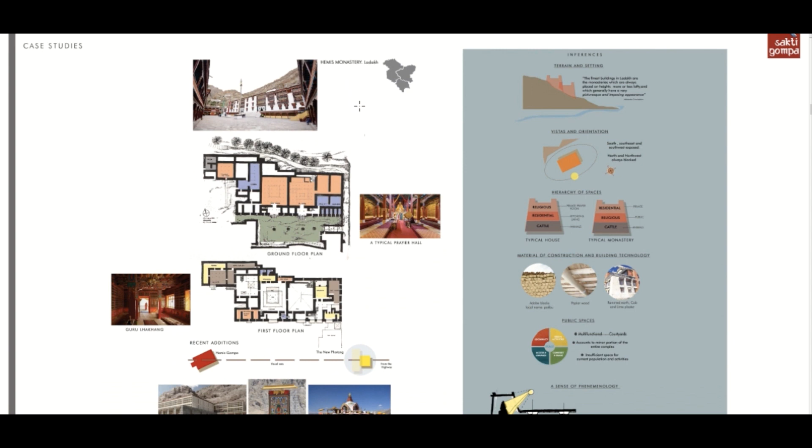The overall inferences from these case studies can be divided into site level inferences, building level inferences, and other functional inferences. At the site level, terrain and setting play an important role.

Monasteries are always placed on a slopy terrain or hillock. The site chosen is always higher than the settlement. The orientation towards south plays an extremely important role owing to the extreme climatic conditions. The north side is usually blocked by the hills, and the south side is left free for maximum southern exposure.

At building level, we have four kinds of spaces which can be seen: the sacred spaces marked in orange, the social spaces which are marked in brown. These social spaces are for monks and nuns.

Then we have common areas or public spaces for festivals, which include courtyards. Then we have residential spaces for the monks to reside in.

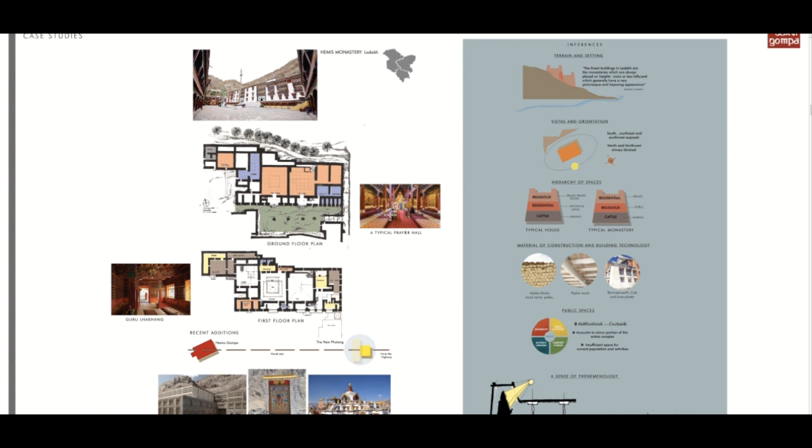Some of the basic components of a monastery are the Dukhang, the prayer hall. This is how a typical prayer hall would look. It is a colonnaded space. Then we have a deity, the main deity, which is worshipped there, and monks pray at regular intervals of the day.

Then we have the Lakhang, the main temple dedicated to a primary single deity. Then we have the Chansa or the kitchen, the Guru Lakhang, the library where sacred scriptures are kept, the Takshaks or monks' quarters, and multiple courtyards with one main one for monastic festivals.

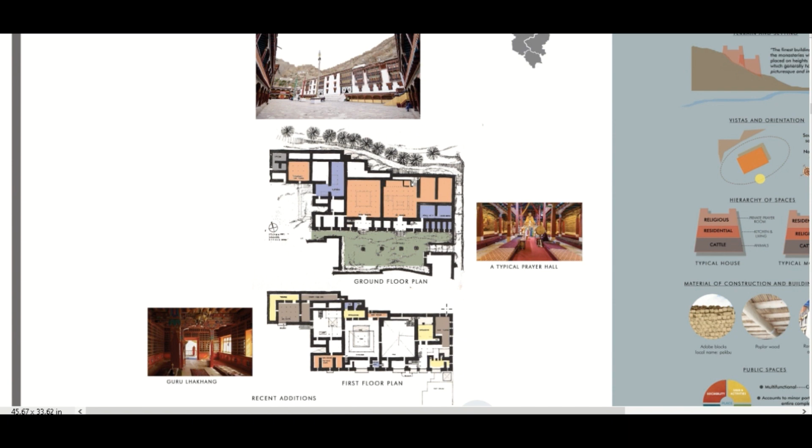Building materials include adobe blocks, which are called pabbu, poplar wood, and rammed earth. When the outer facade blends with the landscape, the interiors are quite colorful and vibrant.

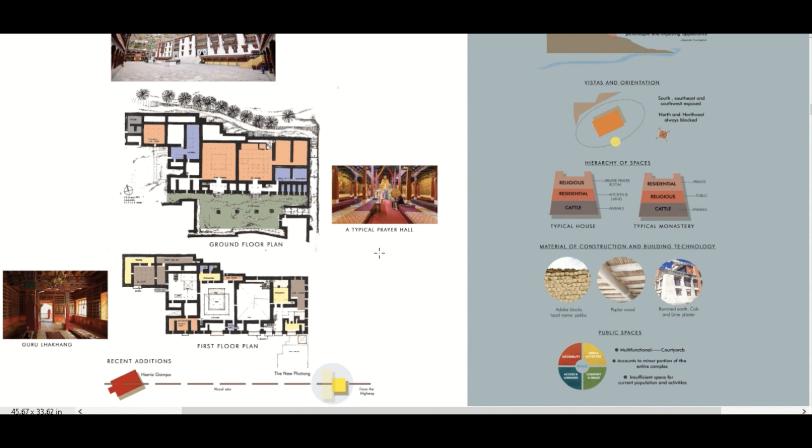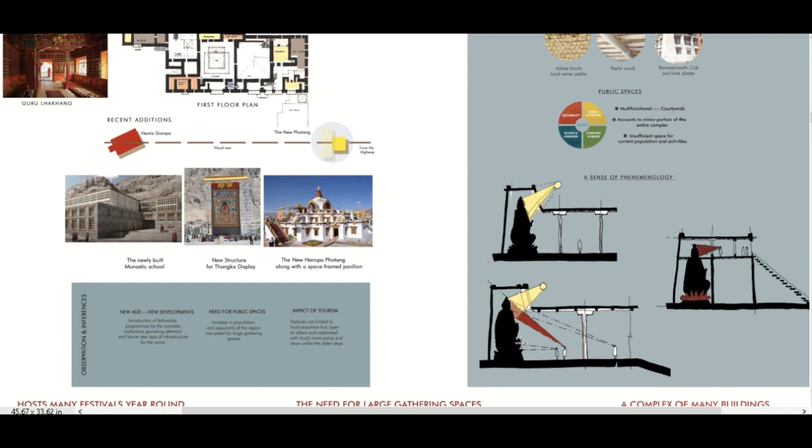Functional inferences include a sense of phenomenology in the spaces. As seen in the illustrations, there is a play of light and shadow, volumes, and the image and position of the deity, which play an important role in the way we experience the spaces.

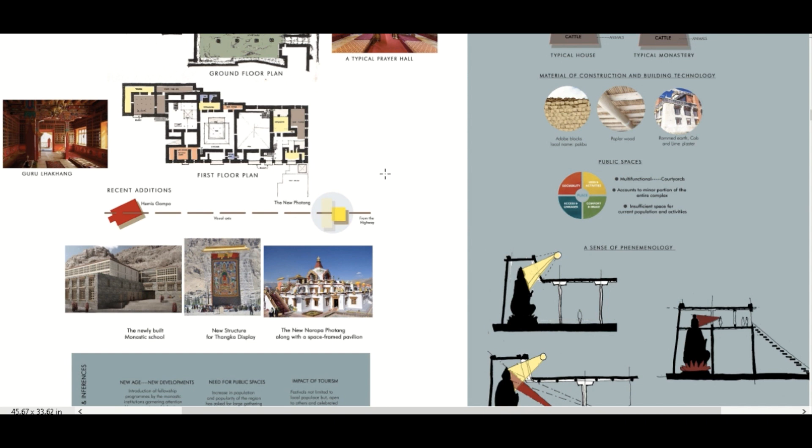Another inference concerns public spaces. Since monasteries host many monastic events and festivities throughout the year, owing to tourism and increase in population, there is a need for larger gathering spaces.

Then there is the presence of stupas, which can be seen throughout the landscape of Ladakh. It resembles a tomb for a revered person.

Apart from these, there are characteristics of Ladakhi architecture. The first is the Ka and Kaju, the pillar and capital combination, which is very common and a must in Ladakhi architecture. Then we have Rabsal, which is nothing but balconies.

Then we have Sinchak, the window bands, which are present in all buildings in Ladakh. Then we have the skylight or lantern. We also have dry composite toilets, which are a necessity in the region where there is scarcity of water.

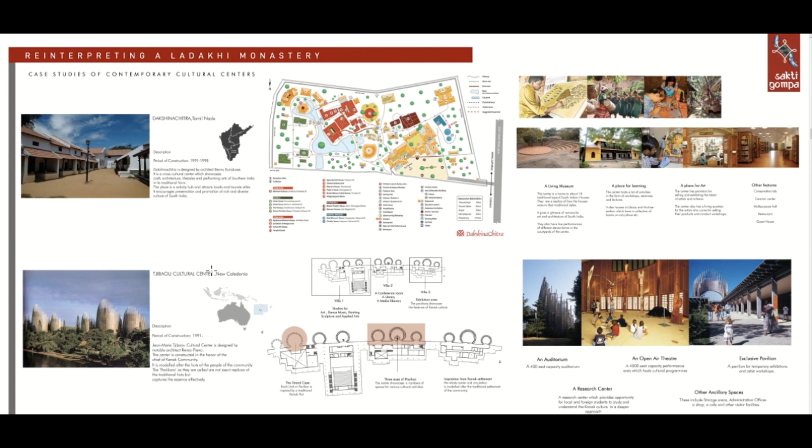Since we are talking about monasteries being cultural centers, a few cases of contemporary cultural centers were studied. The Tjibaou Cultural Center and the Dakshinachitra were taken into consideration.

A comparative case study was done and it was inferred that the program of a cultural center and a monastery are quite similar in ways. Both have community spaces, both promote traditional art forms and local culture, both play a role in imparting local knowledge and skills to the community, and both hold cultural events and programs for the upliftment of the community. Therefore, a monastery can be referred to as a cultural center for present Ladakh.

Another inference is that since the monastery is already an essential part of Ladakhi culture and an indigenously developed typology, it won't be seen as a foreign element, and people will be able to relate and connect with it better.

After the case studies, we next see the need to understand Ladakh as a site for the project at different levels. First, the range of altitude is from 2,500 meters to 7,700 meters above sea level. It receives the highest amount of solar radiation in India, and the summer months are from June to September for 4 months, while winter is for 8 months.

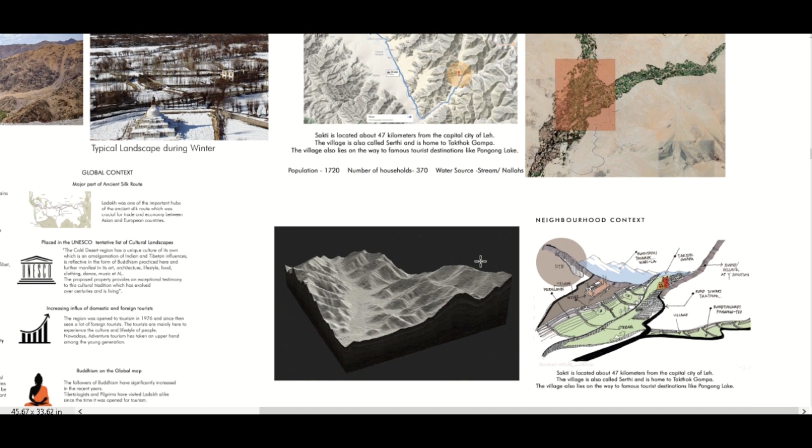It has a population of about 1,720 people, and it lies in the tourist circuit on the way to Pangong Lake and also Warila. The site is about 19 acres in area. The difference between the highest contour and lowest contour is about 150 meters.

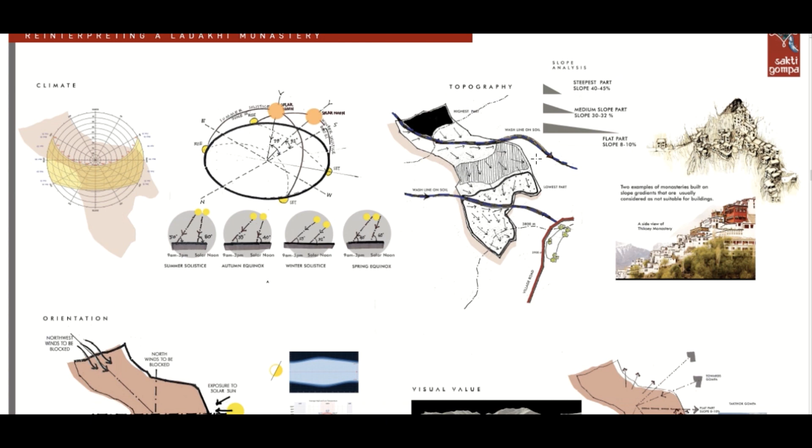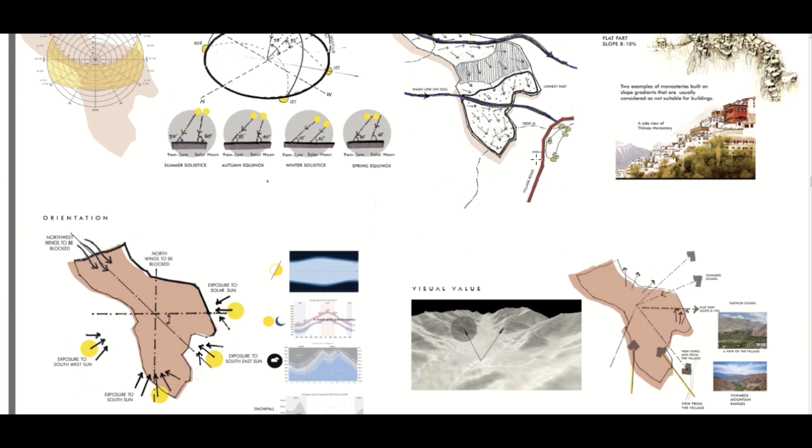Various aspects were analyzed, including climate, orientation, topography, and visual value. Since we are talking about imparting a sense of civic pride and cultural value to the monastery, it has to be placed accordingly and should have an impacting effect on the people. Also important is the topography, which gives a characteristic feature to all forms of Ladakhi architecture.

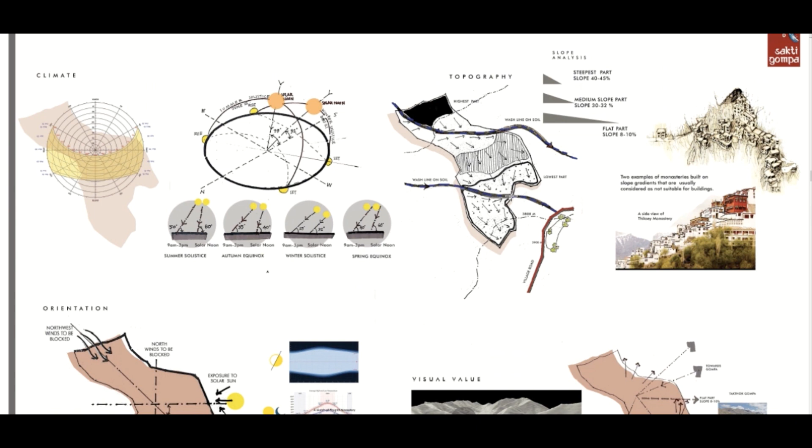There were three user groups identified: monks and nuns, locals, and tourists. Monks from the region of Ladakh are part of the three Ratnas of the Buddhist tenet of Dharma, Sangha, and Buddha, and people share a connection with them.

Monks are not only taught religious scriptures, prayer, and meditation, but also the art of sand mandala, traditional dance especially mask dance, and the art of stone carving. Their curriculum includes astrology, traditional medicine, language, and mathematics, apart from traditional scriptures and prayers.

Lifestyle of Ladakhis is based purely on seasons and can be divided into summer and winter activities. Summers are quite hectic with attention towards agriculture, tending to tourists, and construction activities. But the winters are much more leisurely with no agricultural activity, filled with monastic festivals and events which keep them engaged.

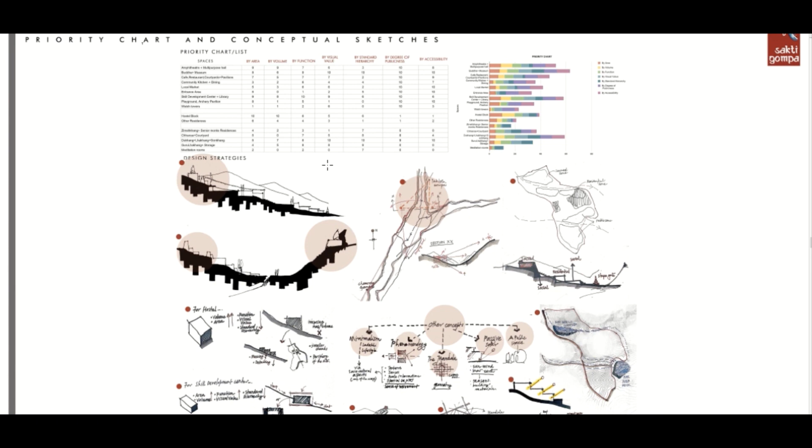Before zoning, a priority chart was conceived for the limitation and scope of the project. The major focus of the project is the public zone and sacred zone. There are a few sketches of design strategies which were a result of analyzing the priority chart.

The zoning was majorly based on hierarchy and priority of spaces, keeping in mind the character of the terrain too. The possible usage of material and techniques being rammed earth and other forms of mud, a grid system was considered which would help to optimize the construction process.

Zoning in terms of 2D would not be enough in a setting like Ladakh. Volumes play an important role, hence massing studies were done for the proposal.

Here is an example of Leh Palace, which appears to be one solid mass from outside. But when we take a tour inside, we see that the mass is a combination of multiple terraces and courtyards, balconies, and narrow corridors. Therefore, we can see these examples in typical monasteries too. Smaller volumes stacked and staggered in combinations add to a solid mass of structures.

These are some of the 3D massing and zoning site proposals with study and analysis regarding them, and finally a view of the final massing in comparison with a typical monastery.

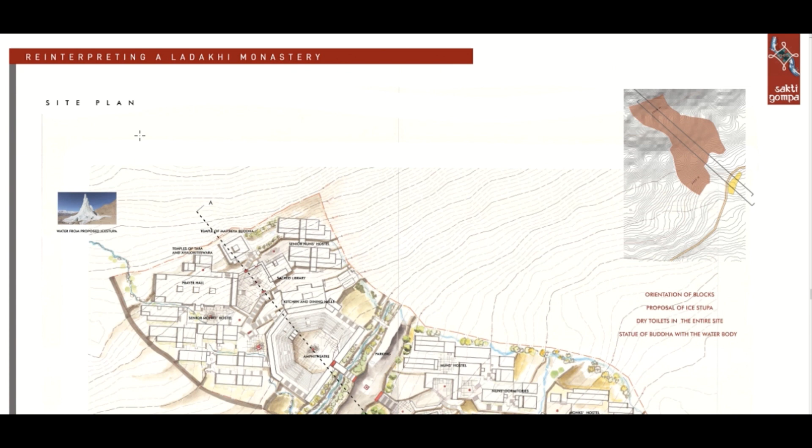Now the design section, coming to the site plan. A key plan shows us that there is an existing road in the bottom portion of the site.

However, there are two roads proposed as a deviation from the existing road, one leading to the lower half of the site, opening to a village plaza, and the other on the upper part of the site, opening to the sacred zone. There are three access points: the pedestrian entry, the vehicular entry for parking, and the entry towards the sacred zone.

An overview of the project would be the sacred zone on the topmost part, including the amphitheater, sacred library, the senior nuns' cells, the temple of Maitreya Buddha, prayer hall, and senior monks' hostel. The second part is about the skill development center. The third is the hostels and dormitories of junior monks and nuns.

Next comes the village plaza, which along with the statue of Buddha, overlooks the water body and the valley in the opposite direction. Let us begin our journey from the lower half.

As we approach the pedestrian entry marking the entrance to the monastic complex, we have three stupas placed at this junction. The pedestrian entry opens out to a village plaza, abutted by the water body and statue of Buddha on one side, and opposite that, the entrance to the monks' and nuns' dormitories.

Towards the north, we have the skill development center. Walking across it, we get the reception, souvenir shop, computer center, other workshops, guest hostel, and classrooms. As we move further up, we have the junction between the skill development center and the sacred zone.

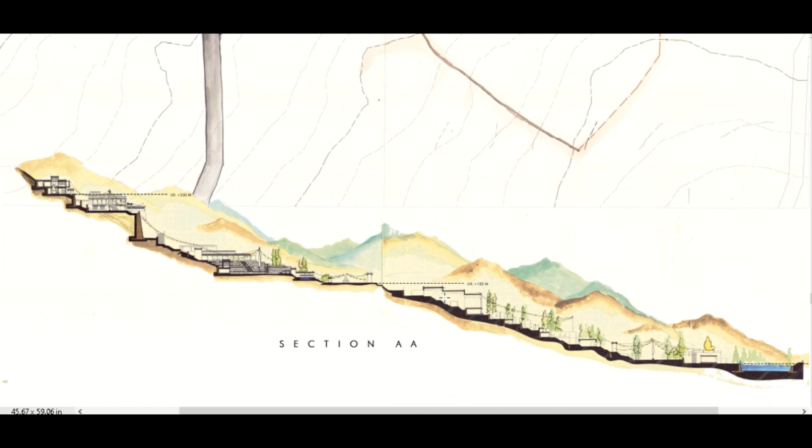Then we have the village plaza at the bottom part, overlooking the Buddha statue, which in turn overlooks the valley and a water body. This is a section cut across the longest side of the site.

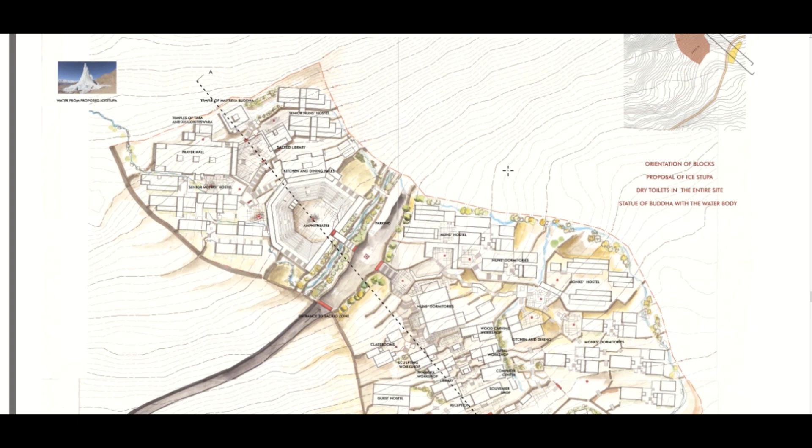A few important points to note in the site plan are the orientation of blocks. In Passive Solar architecture, research shows that orienting a building in the range of 0 to 15 degrees due east or west of true south is most effective, and still effective up to 30 degrees. Therefore, owing to extreme climatic conditions, terrain of the site, and function of the blocks, the residences face true south while other blocks lie within the prescribed range.

Secondly, the usage of mud in the proposal, since mud has higher values of thermal mass and insulation and is also local in nature. There's a proposal of ice stupa and dry toilets in the site, pertaining to water scarcity in the region. Then we have large public gathering spaces, as we have inferred.

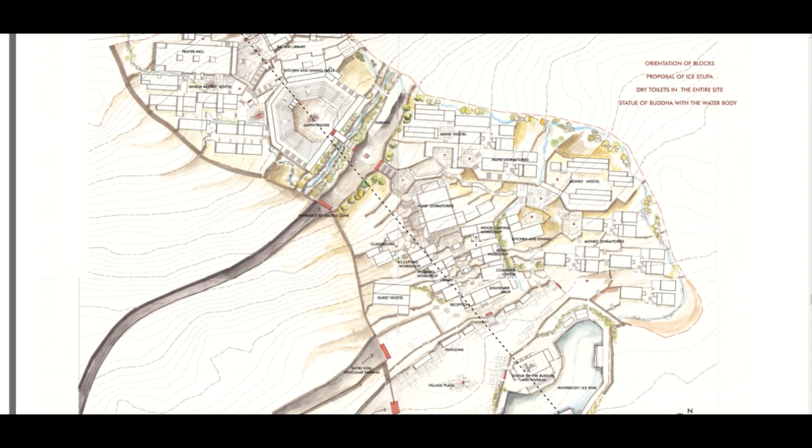There are a number of courtyards throughout the site, including a plaza in the lower part. There is also a water body which doubles up as an ice hockey rink during winters, since ice hockey is a local sport. Moving to the zones in detail, first the upper entrance and the amphitheater.

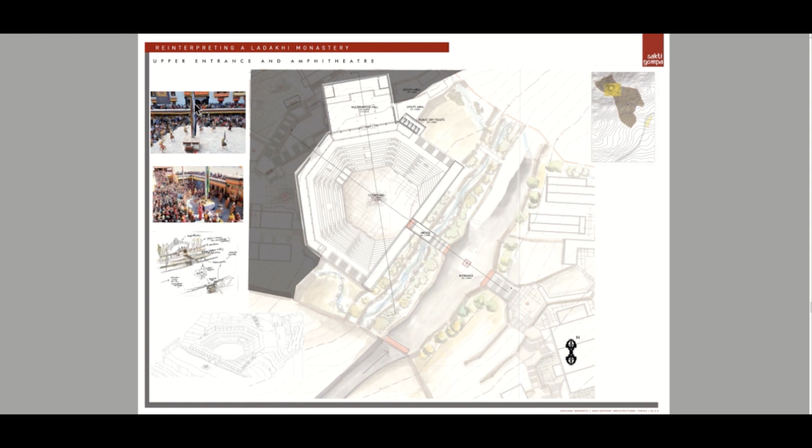As discussed earlier, the entrance to the amphitheater is marked by a water body, over which a bridge moves in order to give a sense of purification and sacredness. Since monastic festivals attract a lot of people, the amphitheater can accommodate about 3,000 to 3,500 people at a time.

There is also a multi-purpose hall attached with this, which can host exhibitions and serve as a community gathering space, and so on.

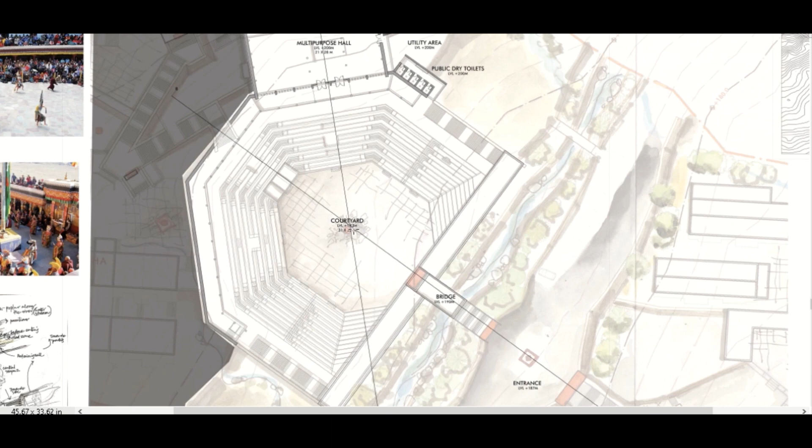Let us look at the sections cut across this axis and this axis. In this section, we can see that the courtyard is surrounded by semi-open colonnaded spaces, which help gain an aerial view of the events. We can also see the kitchen on top of the multipurpose hall, and the musicians' pavilion and other pavilions in the section.

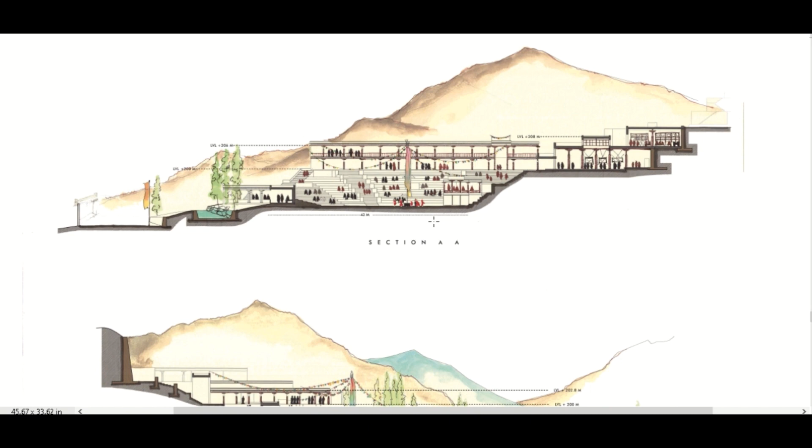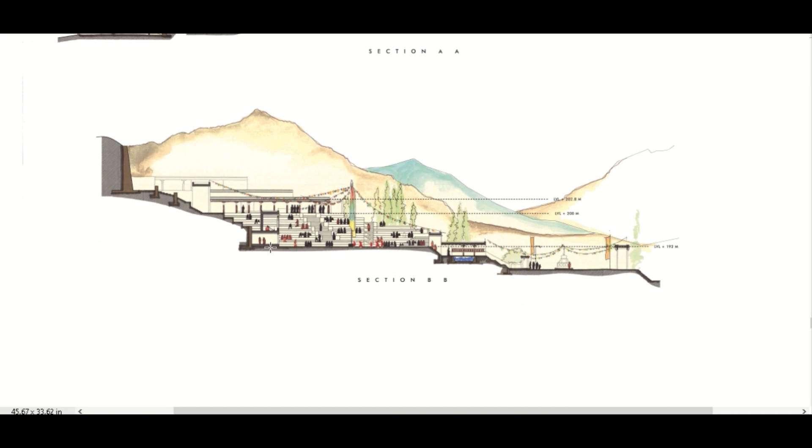The second section shows the entrance stupa and prayer wheels on the bridge. Then we move across and see the pavilion for musician monks during events, and also a green room below it for the convenience of performers.

As we move up towards the amphitheater and then further up, we access a courtyard surrounded by the prayer hall and library. Further up, we have another courtyard and the temple complex.

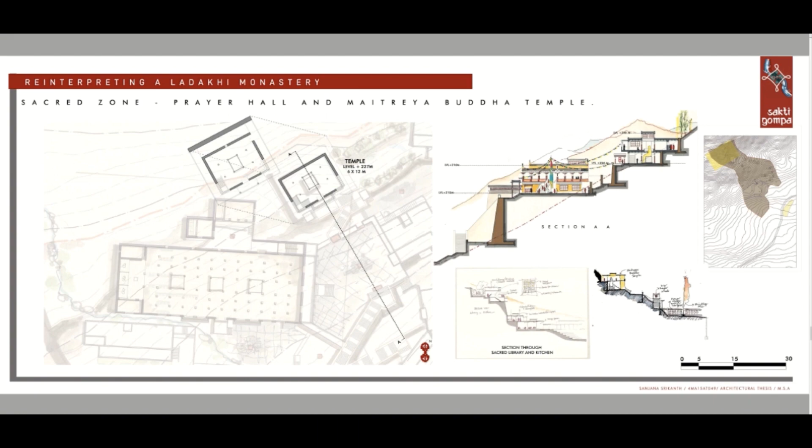We'll look at the Maitreya Buddha temple. As we can see in the section, to evoke a sense of darshan or respect and humbleness in the devotee, he sees the foot of the deity first, and as he climbs up, he can see the face. Surrounding the temple is the circumambulatory path.

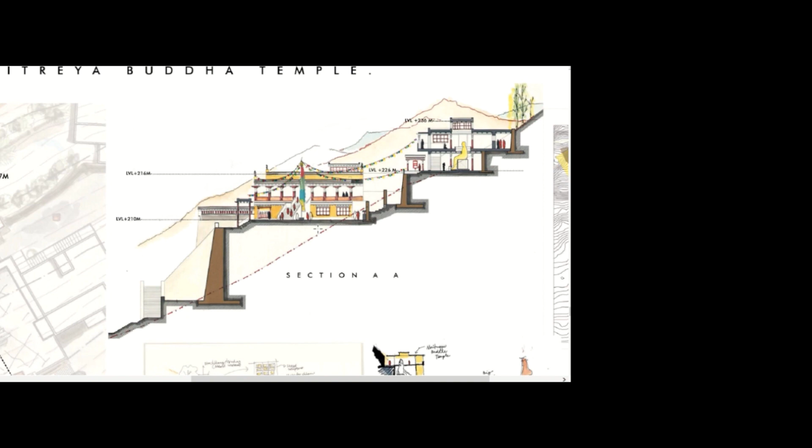Also in the section, we can see the elevation of the prayer hall complex. We now look at the prayer hall. It is a colonnaded space of 55 by 20 meters.

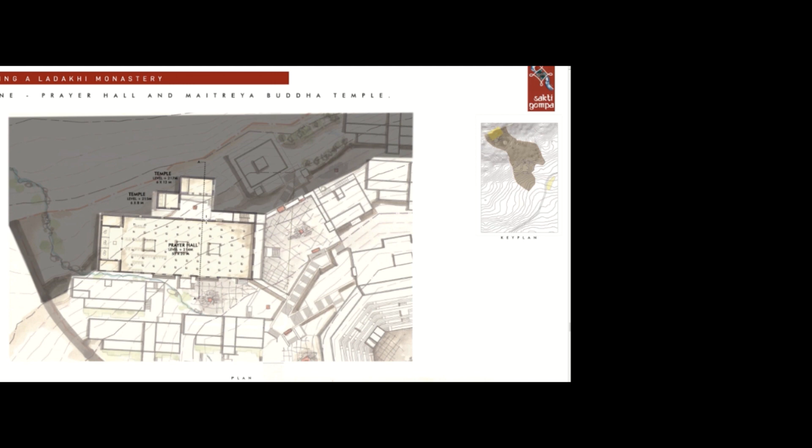Leading from inside is a courtyard with temples of the female deity Tara and the temple of Avalokiteshvara. The deities face the eastern direction. The upper part of the complex is the prayer hall, and the lower part becomes the monks' cells.

Keeping in mind the local style of architecture, structural need, and to break the monotony, there are two wide bays which are protruded, acting as buttresses.

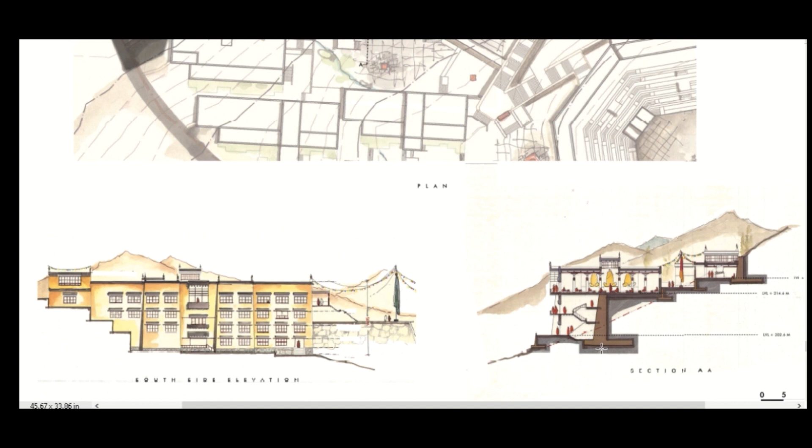In this section, we get an idea of the site terrain and interiors of the prayer hall. Let us climb down the monastic complex and look at the public zone.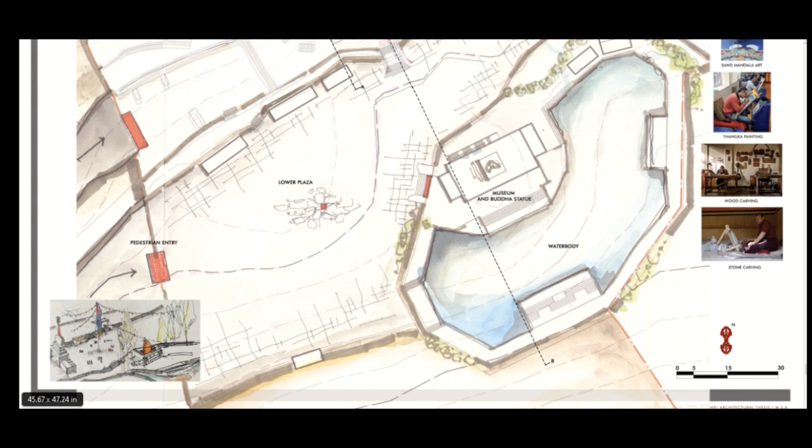To the left, we have the entrance to the Skill Development Center. As we move across the Skill Development Center, there are workshops and spaces designed to accommodate activities like clay sculpting, metal carving, sand mandala art, thangka painting, wood carving, and stone carving.

We have reception, souvenir shop, library, computer center, and workshops with spill-out spaces. There are pavilions and terraces planned to give viewpoints and pause points. Then we have the classrooms and the auditorium.

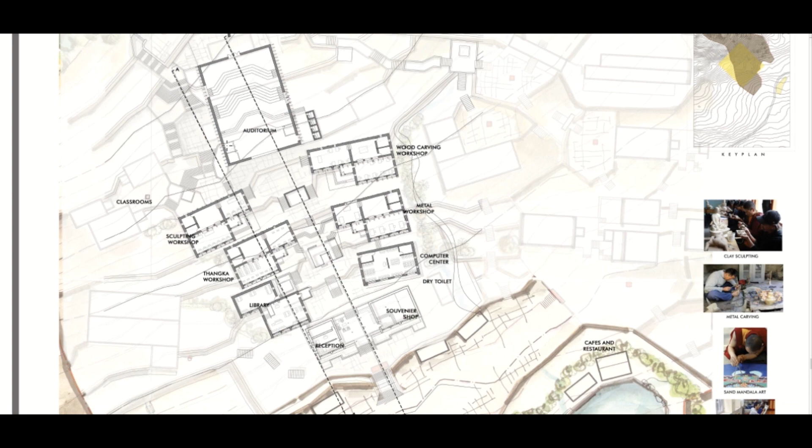Let us understand the auditorium space, which is spanned with the help of portal frames and wooden truss to support it structurally.

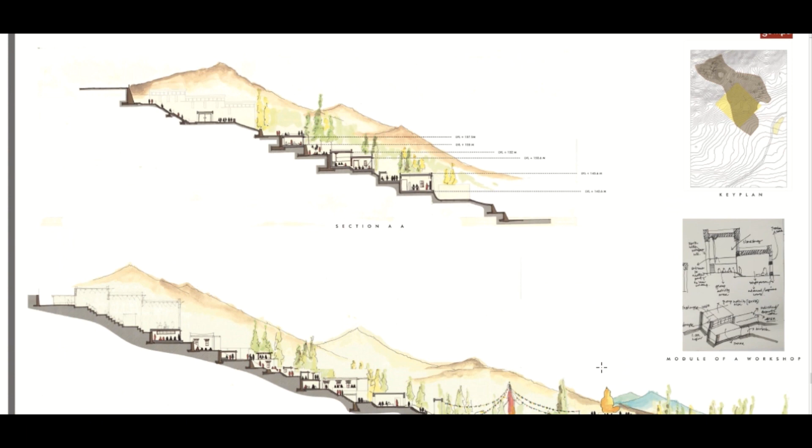To understand in section, all the workshops follow a module wherein we can see there are three levels. One for beginners, which has an entrance through an airlock, used for insulation when there is frequent movement of people. The second level is for group activities, which also has an in-charge office along with storage. The third level is for advanced courses.

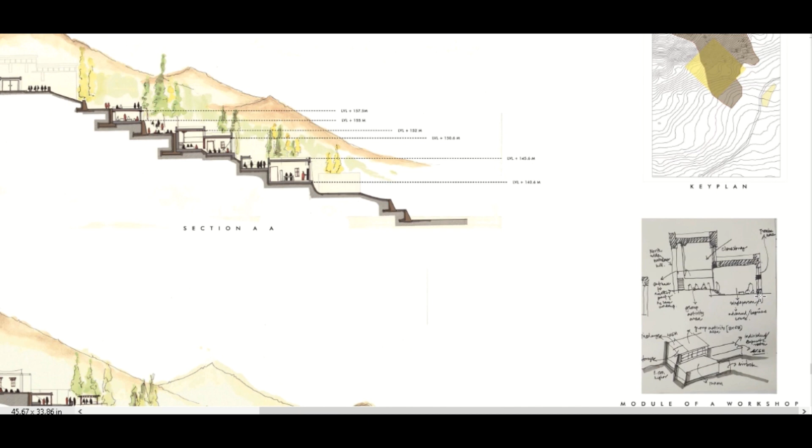Workshops and activities like thangka painting, sculpture, and metalwork involve sitting on the floor. Hence, windows are placed with lower sills to gain maximum light and connect with the outside. The south side walls are made up of trombe wall.

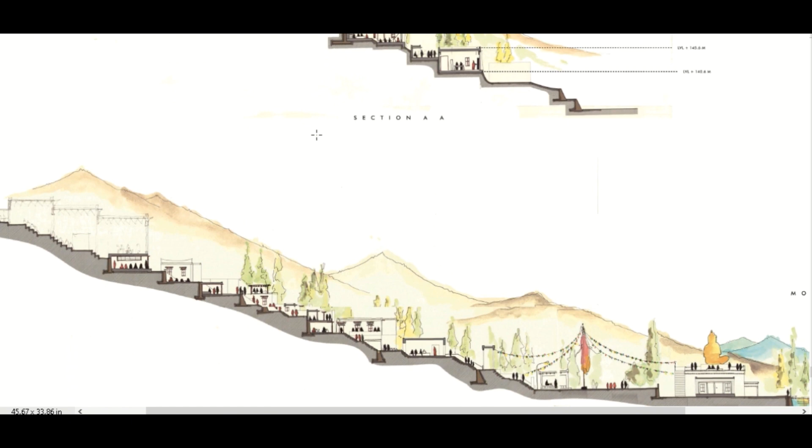In the section, we can see it is a combination of multiple levels and terraces, a combination of enclosed and semi-enclosed spaces. There is an attempt to make all the roofs of the blocks accessible, so they act as pause points and viewpoints overlooking the Buddha statue and the valley beyond.

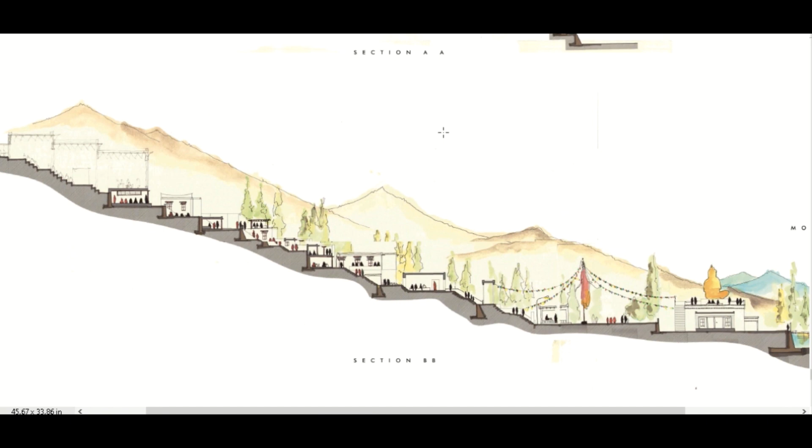These terraces and pavilions also act as small informal gathering spaces which add to the vibrance of the place. This section especially represents the relationship between the Skill Development Center, the village plaza, and the Buddha statue with the water body.

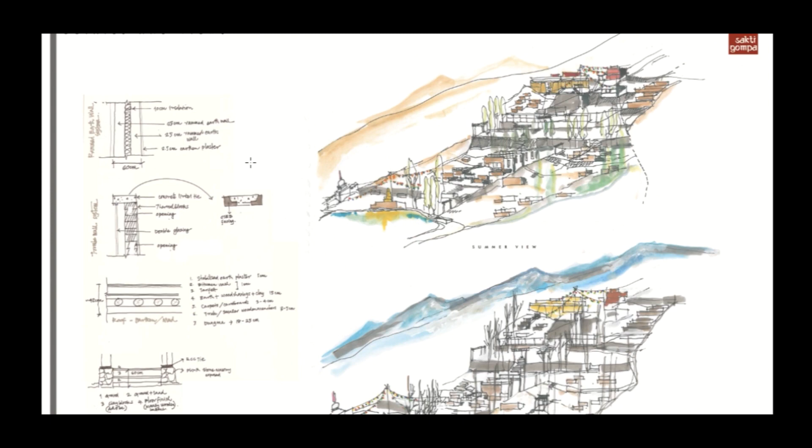Finally, we look at some construction details and views. Here we see the system used for rammed earth. The rammed earth wall is 60 centimeters thick, with two layers of rammed earth on either side and an insulation layer of 10 centimeters in between.

Then we have the Trombe wall system, which works on the principle of currents and thermal mass. There are three parts: glazing or double glazing, thermal blocks, and openings. The air gets heated due to the glass and enters the space via the upper opening in the thermal block wall. Then the cold air comes down from the bottom opening and gets heated again. The room is kept warm throughout due to the thermal insulation provided by the thermal blocks.

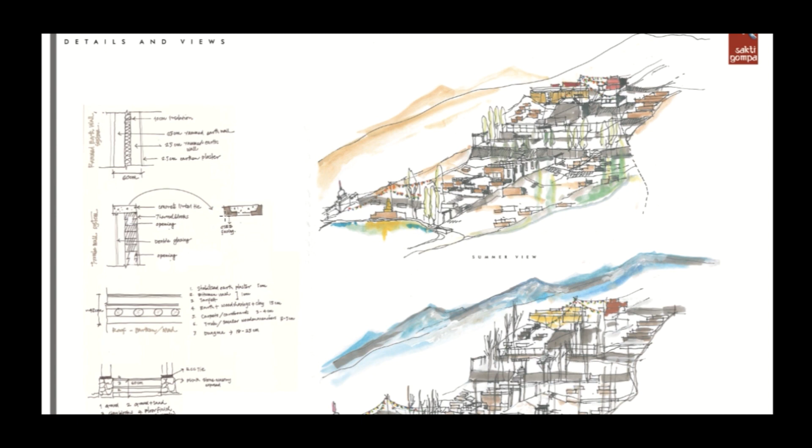The lintel system used has two blocks of CSEB, that is compressed stabilized earth blocks, with an RCC pipe running in between.

Then we have traditional roof and floor systems. The roof system was traditionally completely out of wood and earth, but here we have used bitumen wash and tar felt for waterproofing. The floor system has layers of clay blocks, silt, and gravel used to provide better insulation.

Here is a view of realization of how it might look during summers, and then in the winters. So, to conclude...

If we were to go back to what His Holiness the Dalai Lama said: people of rural society or any society should not be denied the opportunities of modern development, but it has to be made sure that the development happens in a way that complements our roots and culture, rather than overpowering them. This project is an attempt to bridge the gap between the past values and modern requirements of present day Ladakh. Thank you.